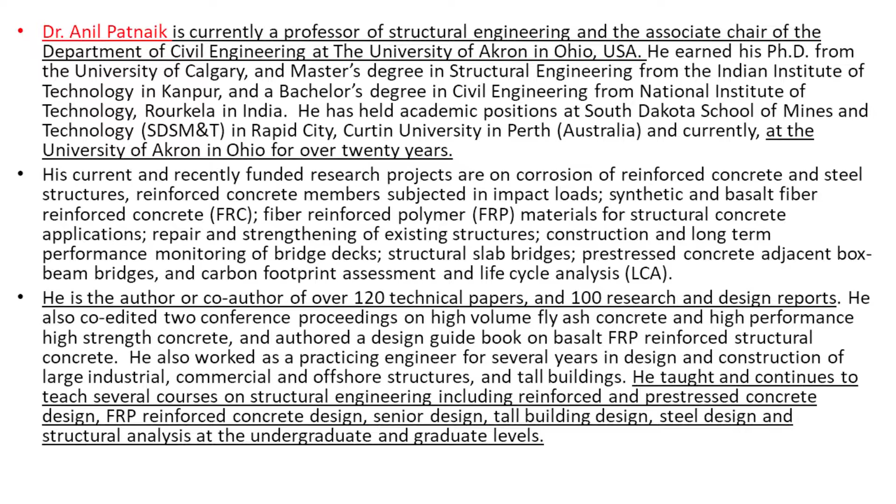Certainly, Ohio Department of Transportation funded the study with aid of Federal Highway. Dr. Patnaik, I'm not going to read everything about him, but he's a great guy. He's very involved at the university for over 20 years, and I'll hit some highlights and you can take your time to read it if you'd like.

He's still at the University of Akron, chairing their Department of Civil Engineering. It's been 22 years since this study came out, I said 20 years. He's co-author of over 120 technical papers and lots of research in Ohio and outside the state as well. He's still teaching, and has done several courses on engineering, including reinforced and pre-stressed concrete design, FRP, reinforced concrete design, senior design, tall building design, steel design, etc.

Akron is a very good polymer research university, and they also have one of the two corrosion engineering schools where you can get a corrosion engineering degree from start to finish, them and Texas A&M. So a lot of resources at the university provided the content for the paper that was just on the previous page, reduction of bridge cracking through alternative material usage.

It's an extensive paper, 344 pages, a lot of data on the polypropylene fibers and different types of reinforcement. I'll briefly go through what the study talked about at Ohio, which has the second most bridges of all the states, over 26,000 bridges, routinely develops a lot of continuous span structural slab bridges. A lot of short, small span bridges crossing creeks, streams, hills, and valleys.

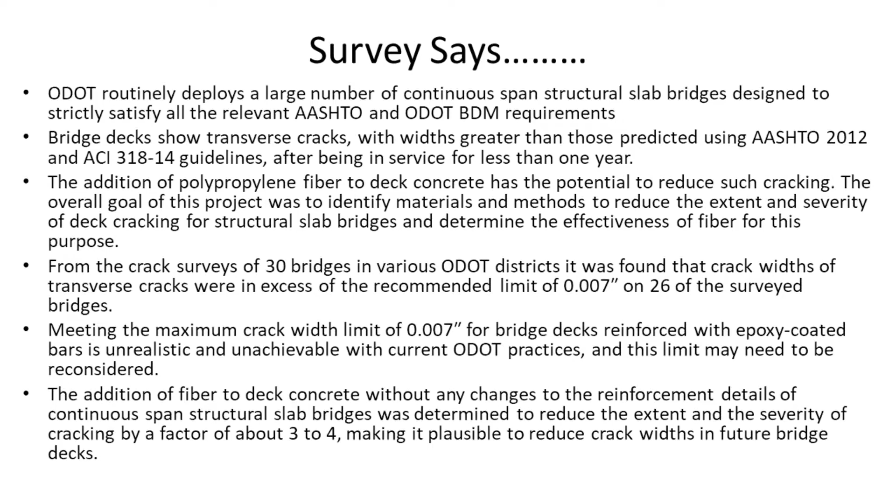The addition of fiber to the deck without any changes to the reinforcement details, using epoxy on continuous span bridges, was found to reduce cracking by a factor of 3 to 4. Pretty significant data, and it was plausible to reduce crack widths in future bridge decks.

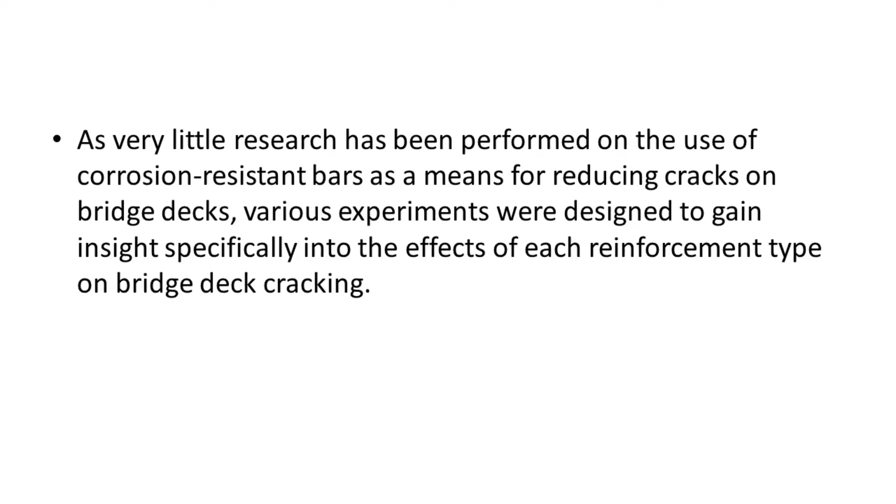That was the survey portion of the report, but I took a section of it and found that very little research, at least what they were looking for, had been done to perform the use of corrosion-resistant bars as a means to reduce cracking or assist with it. So they designed some experiments in this study to present the results.

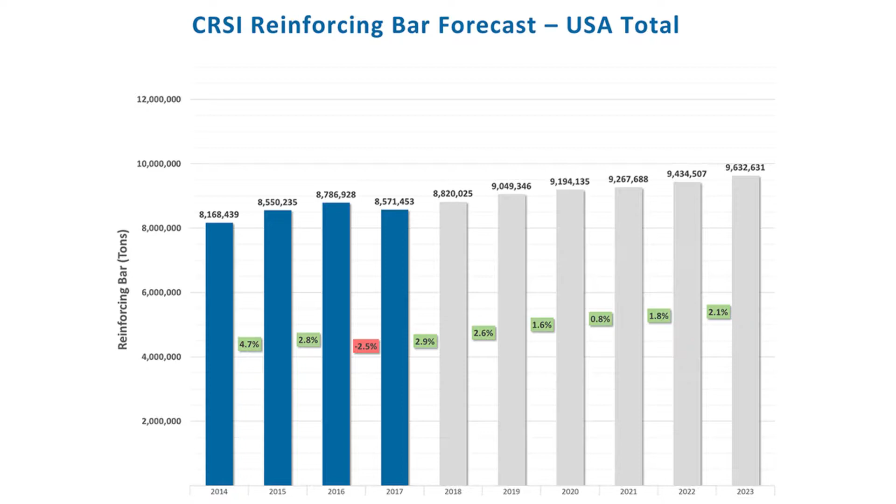Just to take a step back, if you look at corrosion-resistant reinforcement and reinforcement in general, you can see the tonnage here, hard to see, but the blue is 2 years ago. The next is what last year figured out to be, just under 9 million tons of reinforcement. The previous year was 8.5 million, which is a down year.

There are typical trends, and they're always going up. There was a reduction, and the fourth quarter of that year is when tariffs started to hit, causing a lot of hesitation in buying and a lot of foreign material that wasn't bought. So there was a hesitation in the market, and we probably would have settled out even without just the cost of reinforcement in general. It settled in close to 9 million tons in any case.

Next is a series of different experiments. There's a bunch here that applied different methods to different slabs and different types of pull-out tests to look at cracking, and there's always a pounds over slip measurement. I took about 3 of these and looked at them specifically for this report.

The pull-out tests provide a good indication of the performance of corresponding corroded or uncorroded reinforced structural concrete in bond strength, development and anchorage in structural concrete, moment strength of beams and slabs, cracking potential of beams and slabs, fatigue loading of beams and slabs, and impact loading on concrete structures.

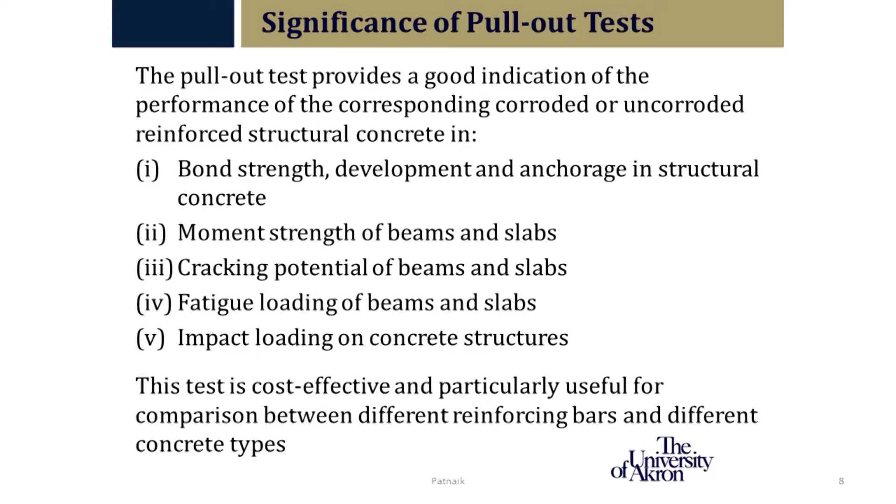So they're trying to simulate a real-world environment. These are cost-effective tests, and they've certainly done these over time.

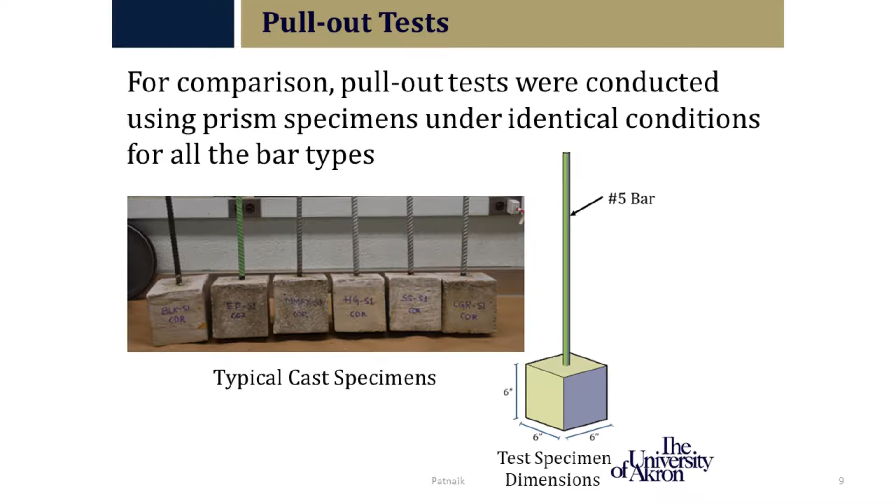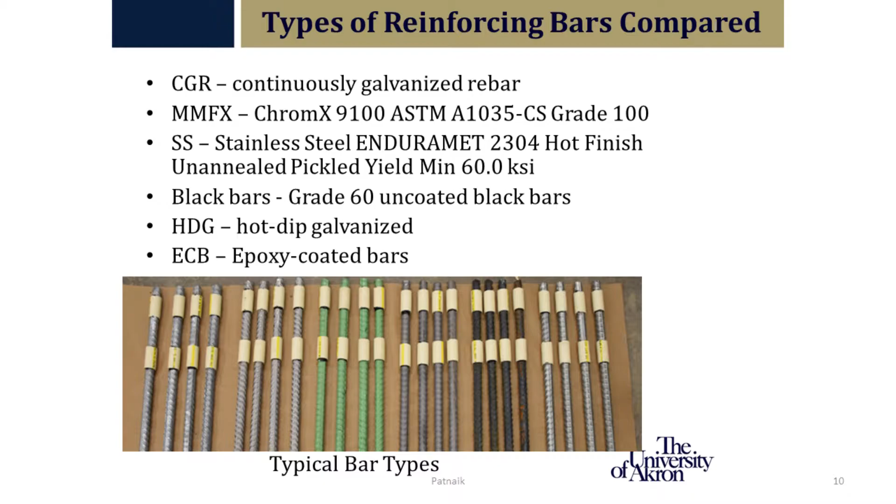This particular first set of tests uses a little 6x6x6 cube with different types of reinforcements inside—prism specimens under identical conditions for all types of bars. These are pictures of the bars laid out prior to casting: continuous galvanized rebar, MMFX 9100, stainless steel at 2304 at 60 KSI, uncoated, traditionally hot dip galvanized, and epoxy coated. They're all provided by industry partners from the University of Akron.

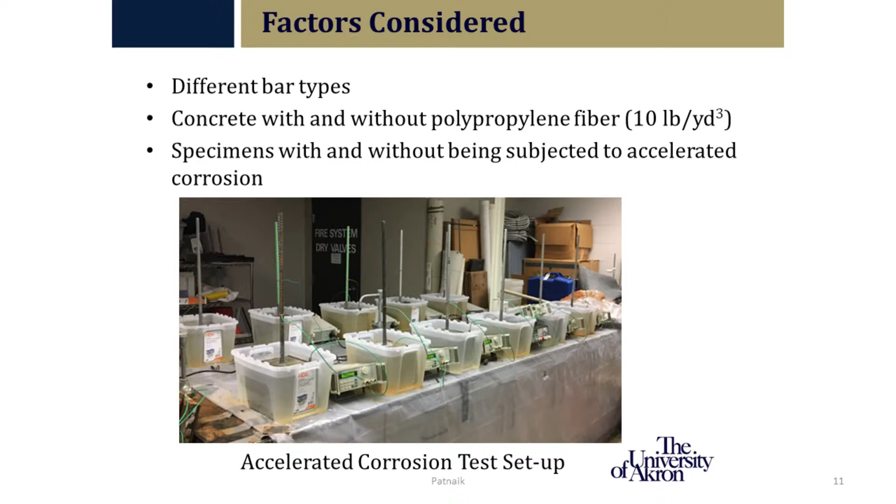This is the setup for the accelerated corrosion test. You can see tubs flooded with different percentages of chlorides, and the concrete with polypropylene fibers was at 10 pounds per cubic yard, which is pretty aggressive.

The specimens were subjected to corrosion and also not corrosion. To determine the pull in pounds, it's measured by putting the 6x6 slab in a press—you can see a gauge on the bottom—and that's how they determine the pounds pulled and the stress.

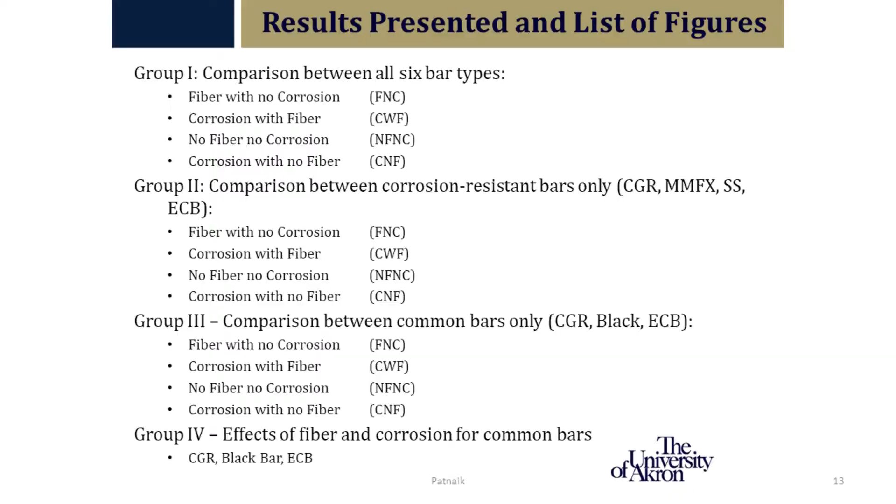In this first look at the test, we're going to examine it 4 different ways: with corrosion, without corrosion, with fiber, and without fiber. Then we start comparing those in different groupings to see the separation, because it gets a little blurry at the beginning with the different types.

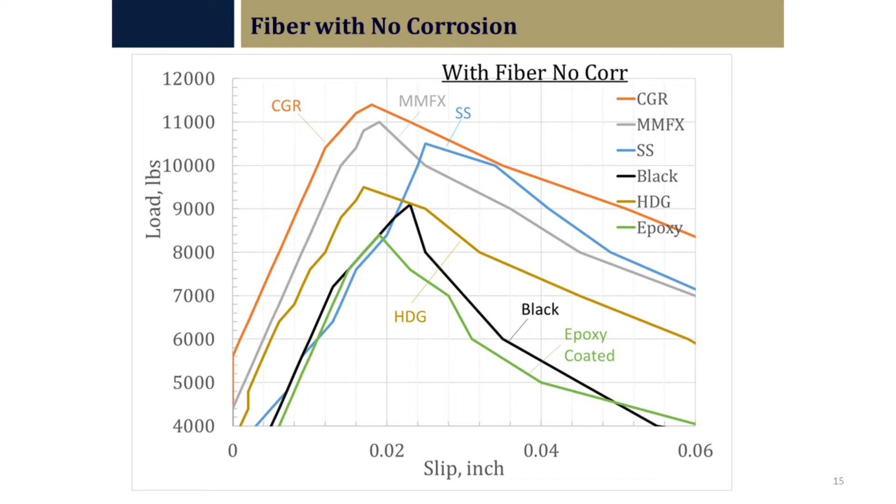For the test result, you want to be far left and high. Looking at this, you have a load of almost over 9,000 pounds where you start to separate from uncoated and epoxy. Hot dip galvanizing is in gold, stainless steel in blue, with MMFX and continuous galvanized towards the top. This is with fiber and no corrosion.

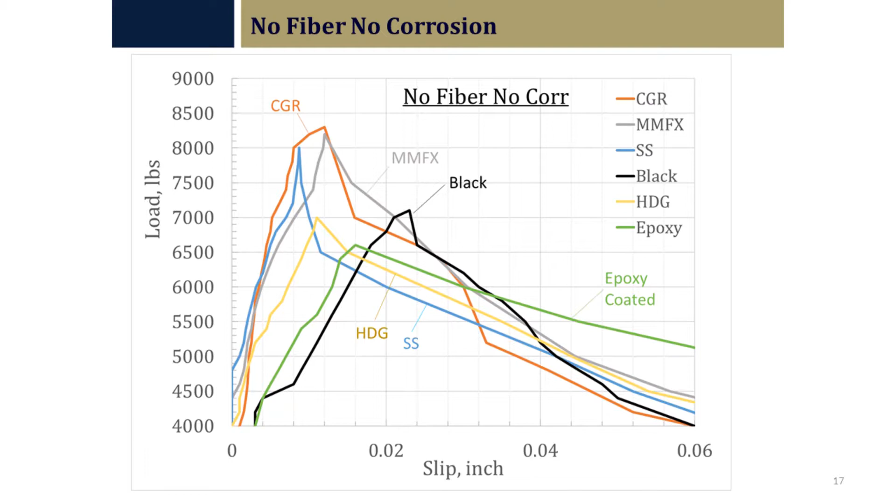Now we're going into the area with no fiber and no corrosion. No consideration of fibers here, but still a pretty good result in pounds over slip. They're all a little closer, except traditional hot dip galvanizing is closer to uncoated and epoxy, versus the three—stainless steel, MMFX, and continuous galv—which are pretty rope tight, around 8,000 pounds and less than 0.02.

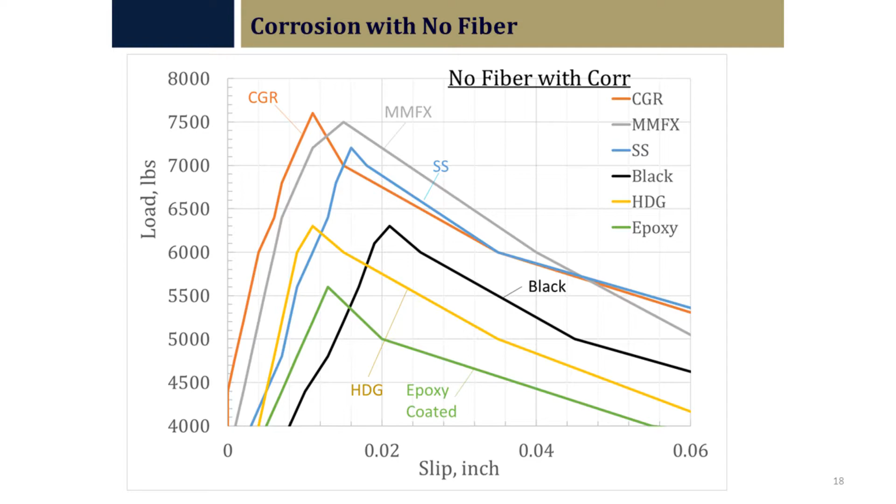Adding corrosion with no fiber, again a little further separation—continuously galvanized and MMFX at the top, stainless steel moving a bit over to the right, and you can see the rest of the results over top of that.

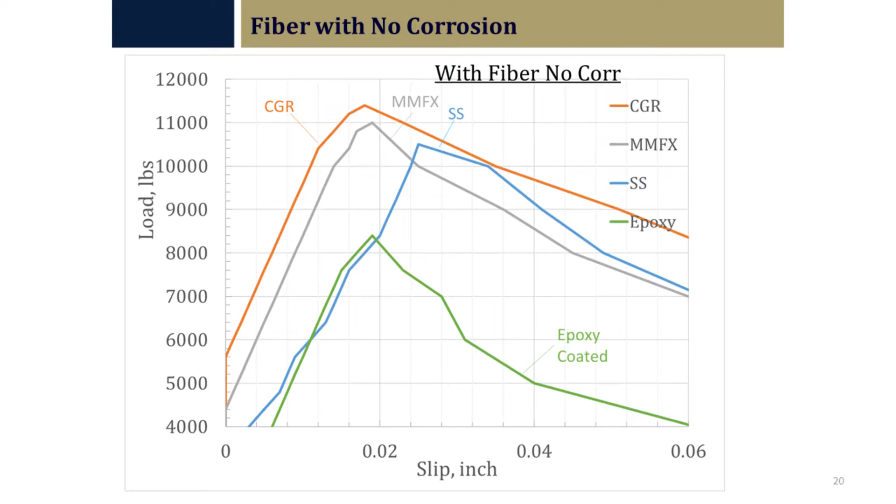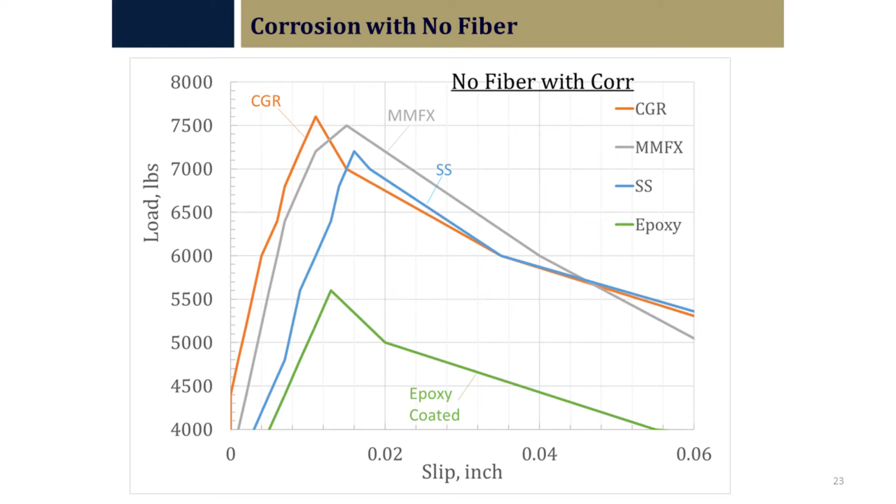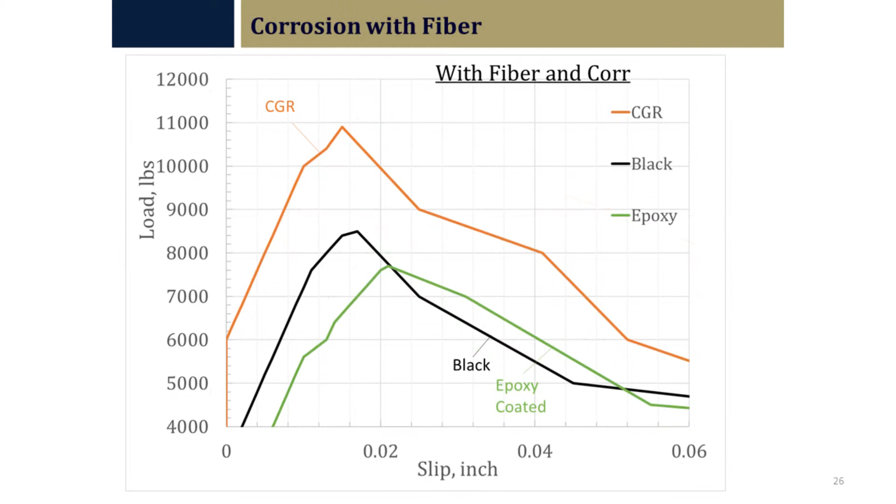Just another couple of groupings here over what's traditional in Ohio. Again, a big separation—that was fiber with no corrosion, corrosion with fiber, and no fiber no corrosion here, which would be the majority of what they're doing out there.

So in theory, if they switch, they could get some advantages over what they have in slip. And same thing, no fiber with corrosion.

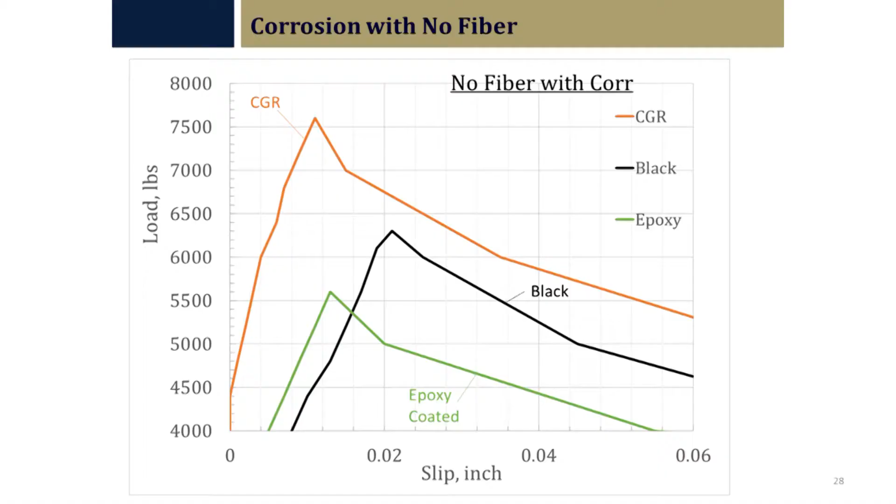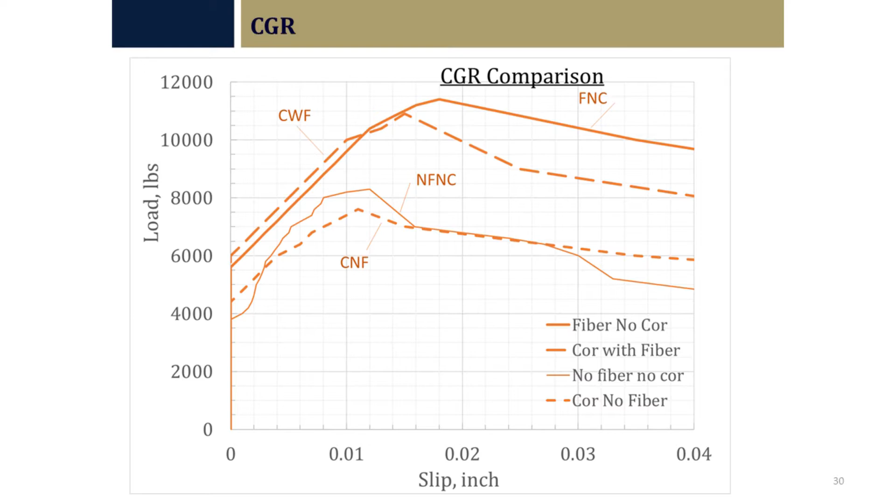To show the impact of fibers and how they help, this is where it kind of sets it off. Fibers are going to help in every single case here, and certainly with continuous galv, where the bottom two are going to be without fiber, and the top two are. So it's a pretty big difference between the peaks of these. The higher left and the higher up the chart, the better.

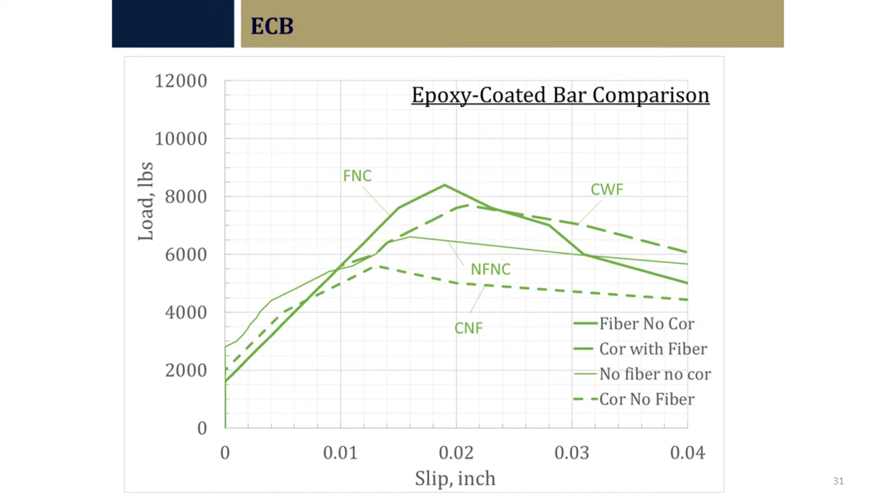So the fibers definitely increased performance. You look at that with epoxy, it's still sliding over to the right, but it is higher. It's certainly helped, no doubt about it. Uncoated as well. So you look at the three examples and you're showing that fibers do definitely help those as well.

Another grouping of tests called direct tension tests, and there were several different kinds of this direct tension test performed, again, similar in prism specimens with different types of reinforcing bars, same ones, and the test performed determined how well the reinforcing bars bonded to the surrounding concrete, and compared the crack widths and the distribution of crack widths. So it's not only about the distribution of crack widths, but how close they are together, but the number of them as well.

So the data collected included applied load, stress in the bar, crack widths, and crack spacing. All important in how chlorides eventually are going to migrate to the surface of the rebar, ultimately. So the average concrete strength was 4,800 PSI on the day of testing.

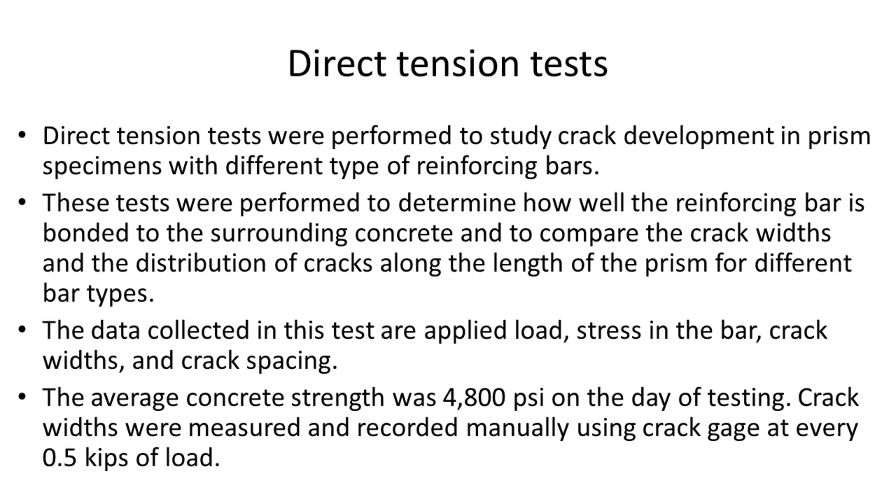There's a lot more data in the report, obviously. I'm just capturing some of the highlights. And they applied this load at every half of a kip. Bond strength development and anchorage in structural concrete and cracking potential of beams and slabs are what's important here.

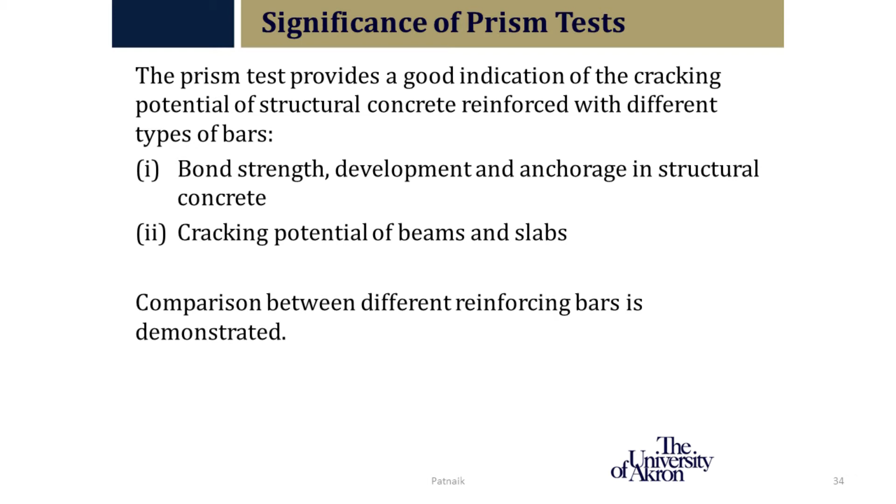This is the layout of the test. You see a coupling nut at the end with a loading jack, jack post, and a load cell to determine what the actual pull-out strengths were.

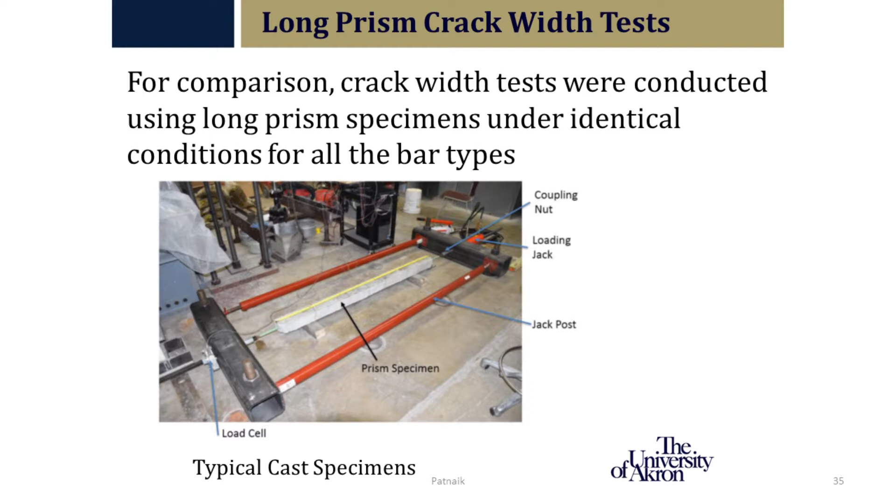Test results. This little black dotted line is just a data point where they took 40 KSI and they said, we're going to put the data points on there and say this is where the numbers lie. It's not a huge significant number, but it's just a data point that they set out in there.

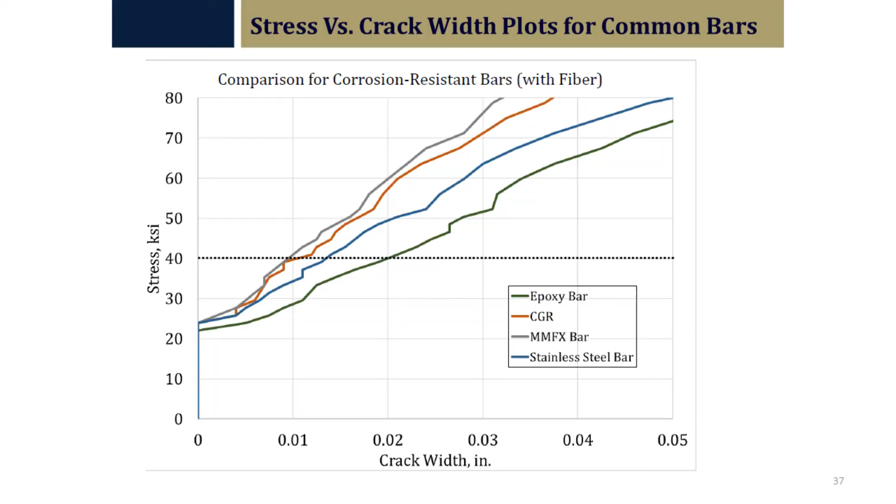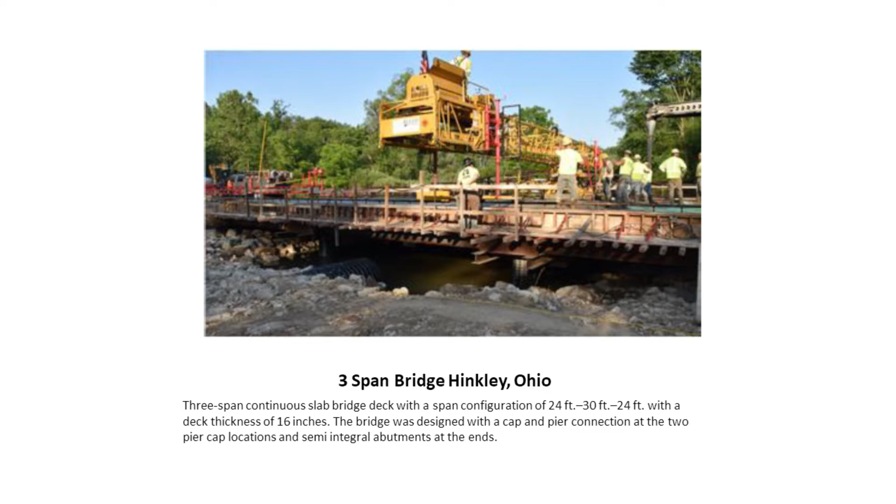So taking all into consideration, Ohio went forward with a bridge in Hinkley, Ohio, just about a little over a year. So they should have some pretty good results coming out on a year in service over this bridge in Hinkley, Ohio. It was just a simple 3-span bridge configuration, 24 to 30 foot to 24 foot with a deck thickness of 16 inches. And the bridge was designed with a cap and pier connection at the two pier cap locations, semi integral abutments at the ends. It's really kind of a pretty normal bridge in Ohio, nothing fancy, but lots and lots of them.

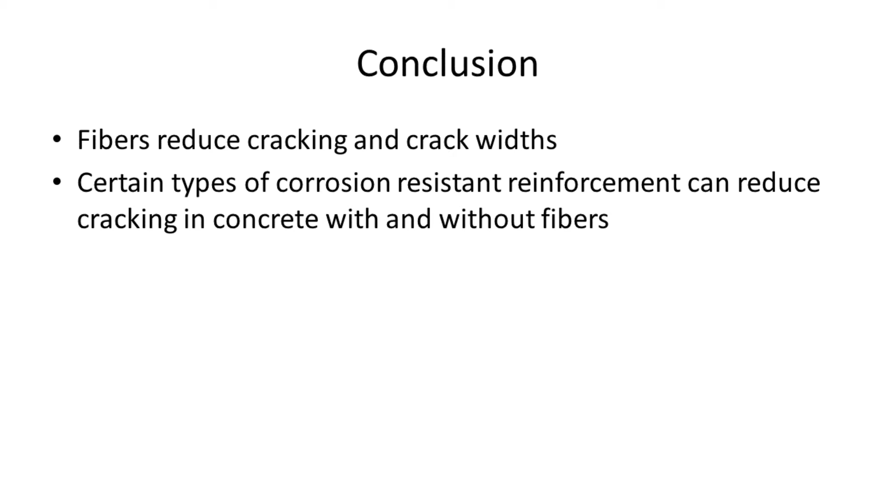Kind of just to wrap it up, really, in my perspective, again, it's from the corrosion resistant, but fibers did show to reduce the cracking widths and number of cracks. And then certain types of corrosion resistant rebars show that they can reduce cracking by themselves with or without fibers.